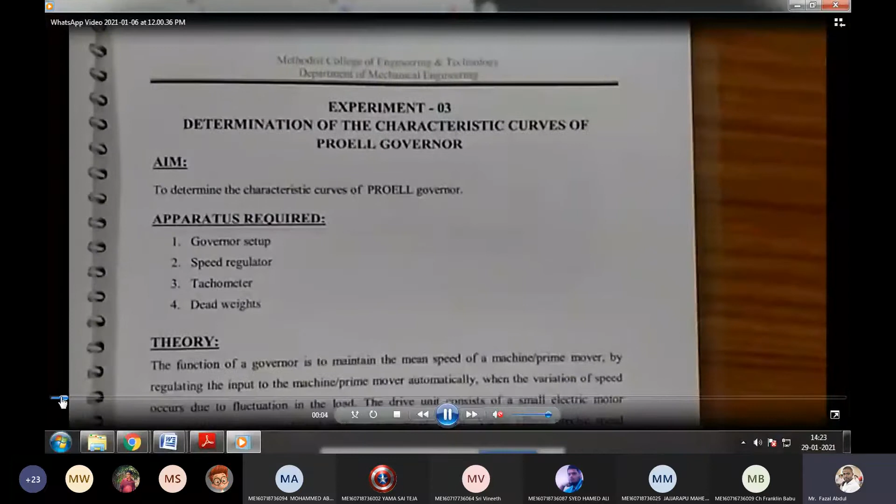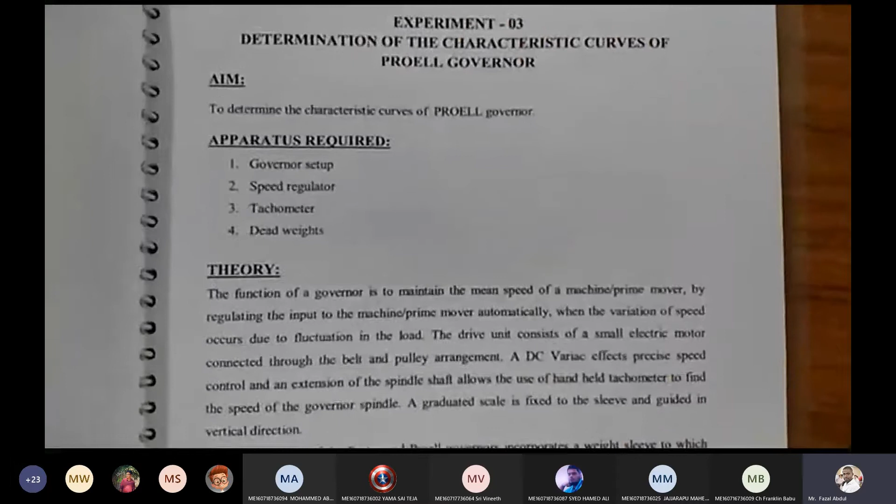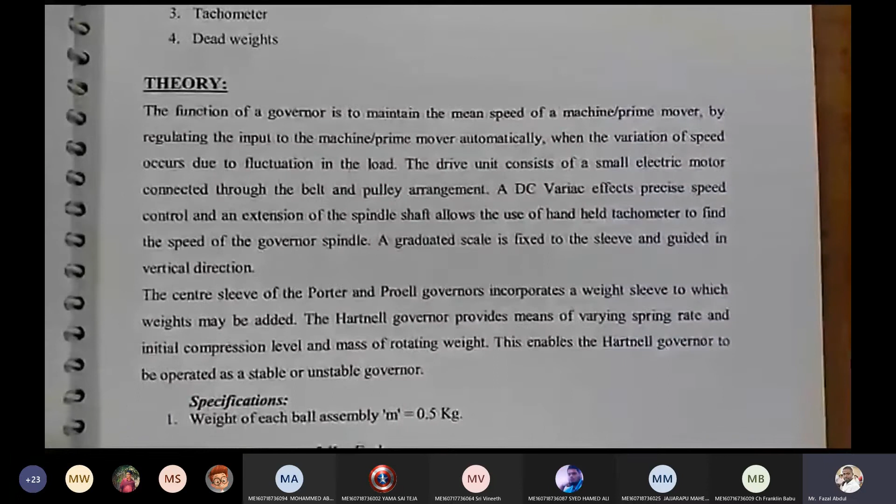For this contact type of tachometer, speed regulator, dead weights are required. The specifications are: each ball assembly ball is 0.5 kg, weight of the sleeve is 2 kg, extension of each length 75 mm. I will show in the video what is extension BG.

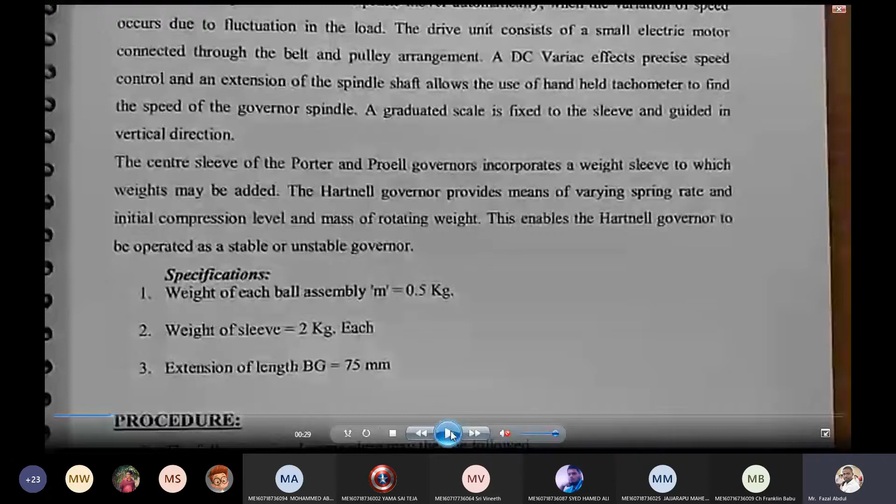Now see here, in previous cases the governor setup was without this extension ball, meaning the balls are here, but in this case extra links are provided, and centrally the load is added. So by seeing this diagram you can conclude this is a Proell governor, by seeing these links.

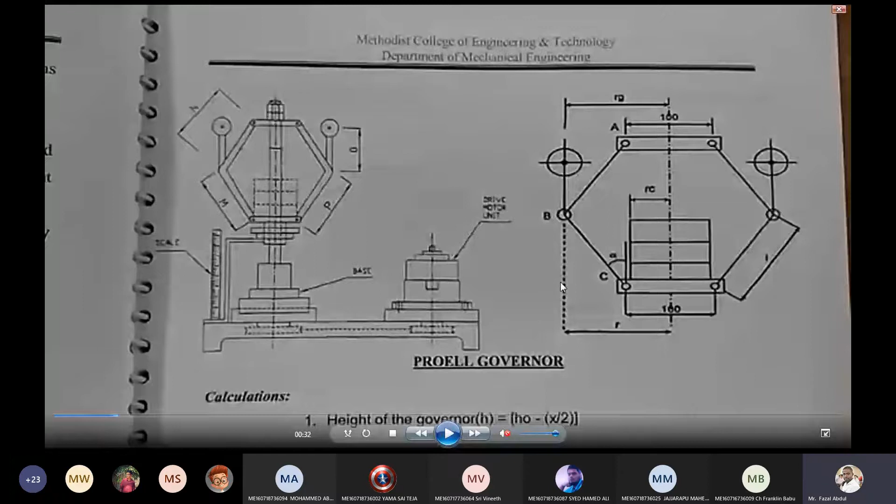How much is the length here? 75 mm, that is given as a specification. The length of the arm, radius of initial radius of rotation.

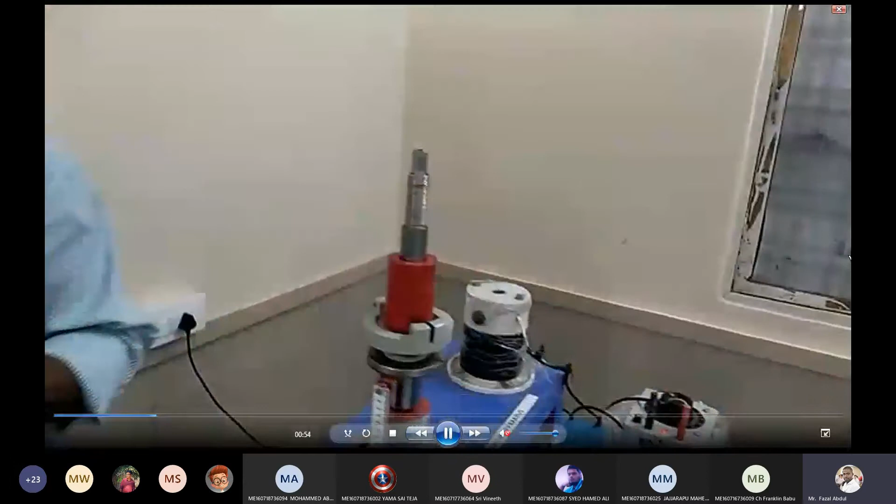Now see here, the setup is changing. Initially it was a Porter governor, now it is a Proell governor. See here, balls, extension balls.

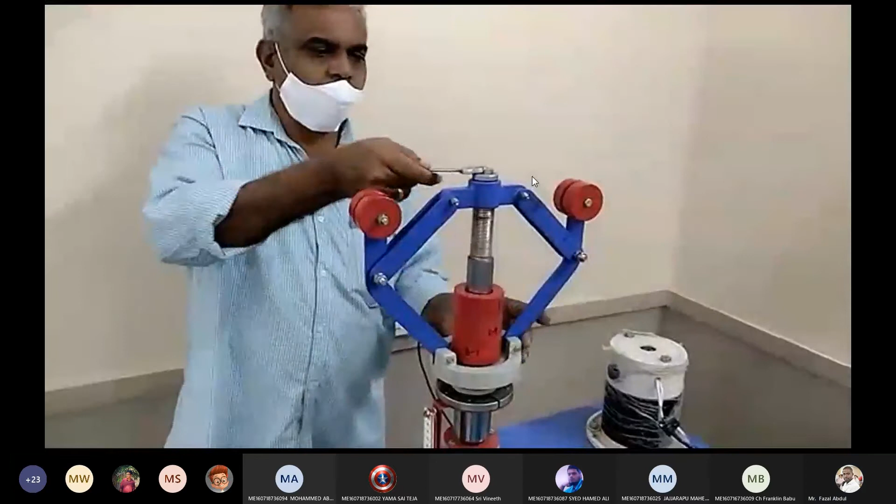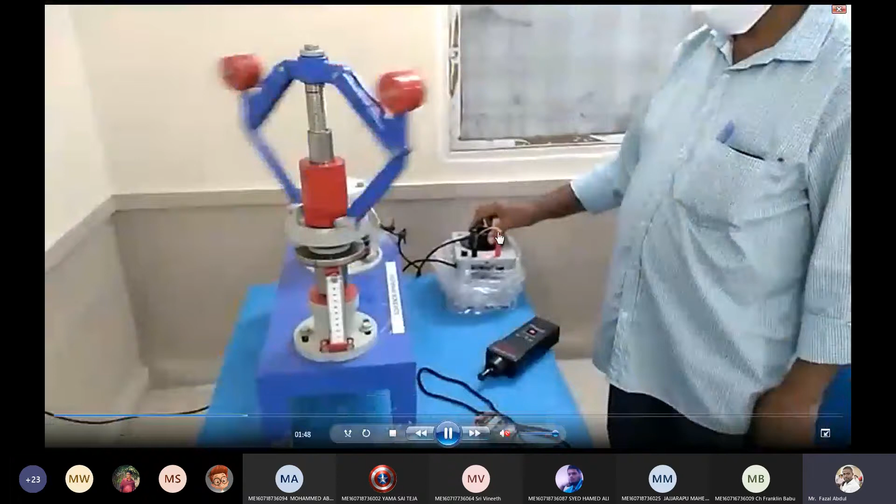This is a dimmerstat voltage controller, current controller. As speed, the voltage increases, speed also increases. Here you can observe the sleeve displacement. Because of lifting upward, the sleeve displacement can be measured on the scale.

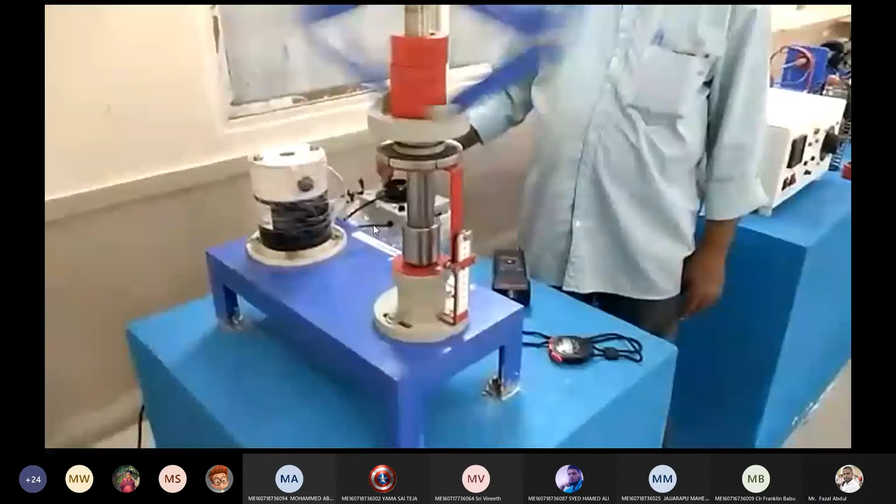Now, for the first time, increase some voltage.

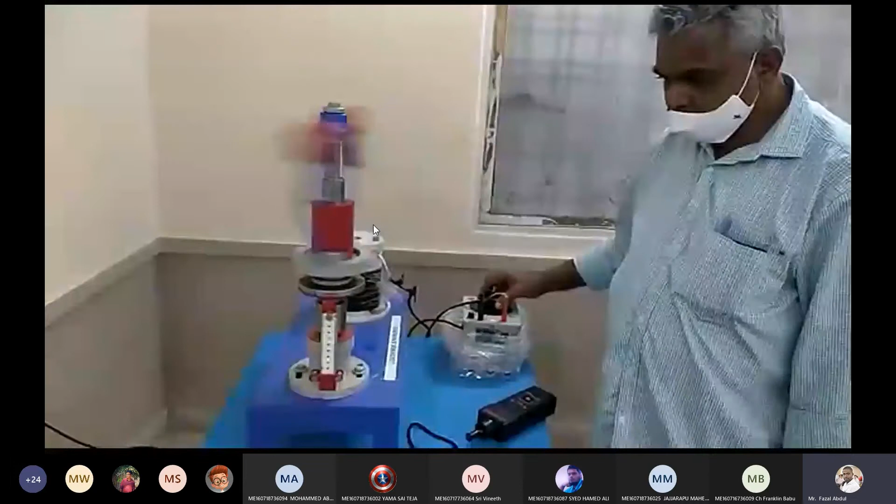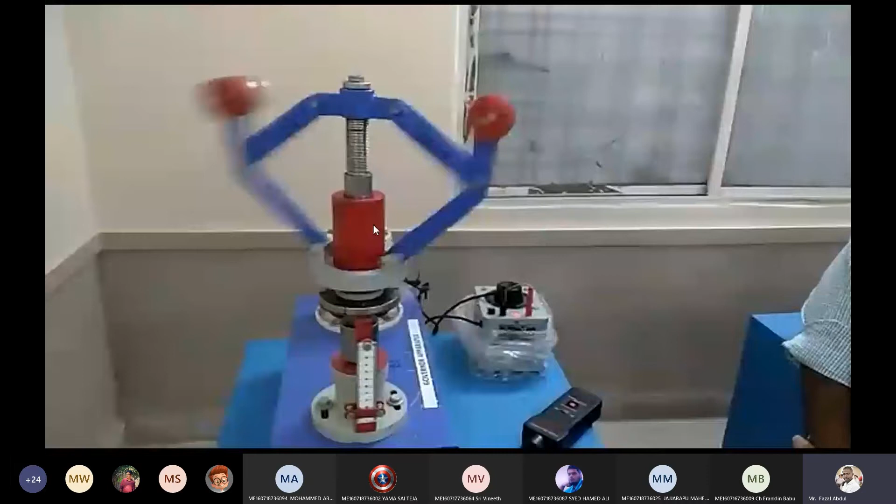Roll number 60. Is it your first class? 64, not 60.

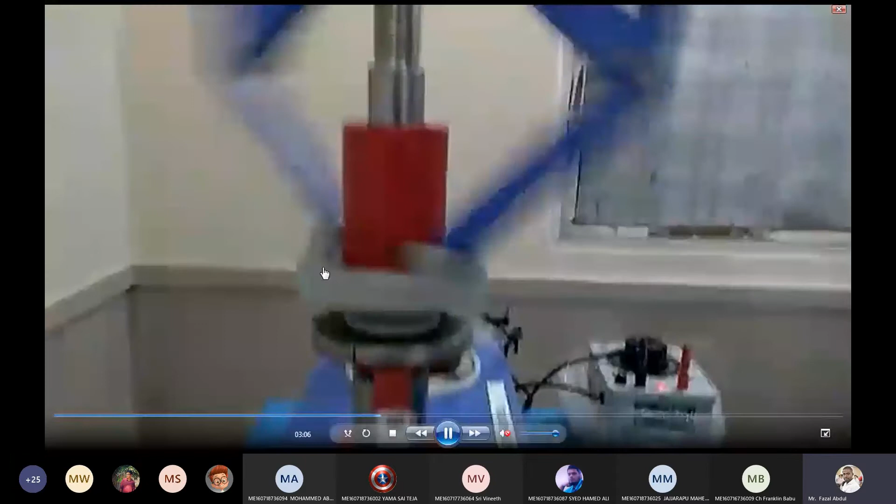Then you are again asking what is the purpose it is used for. At the beginning, in the first class only, I told you.

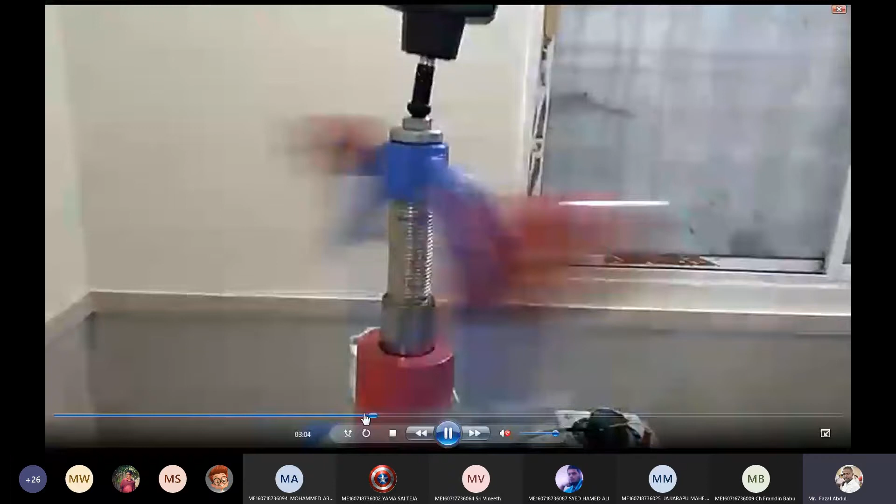How much was the speed? The speed is measured in RPM. The displacement is measured on the scale.

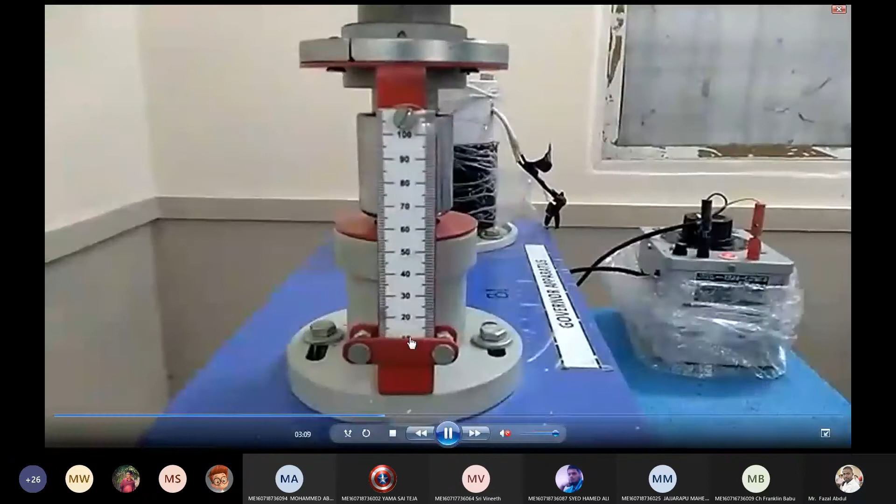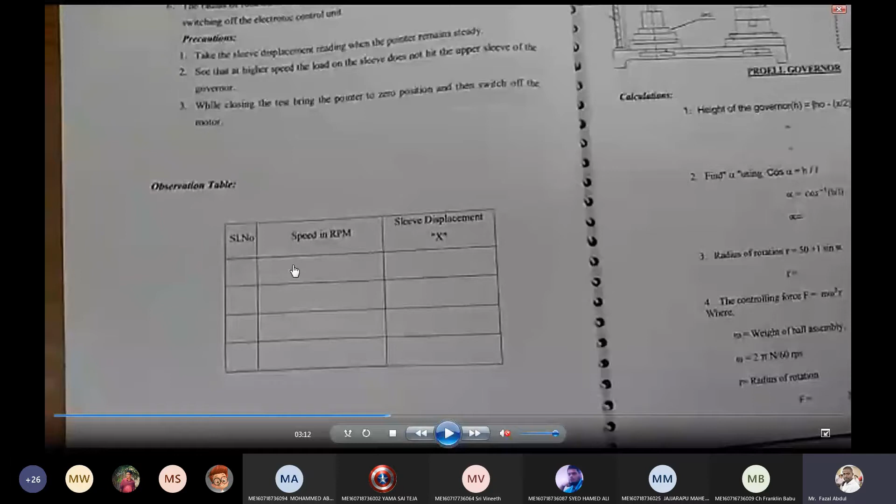You people first make a table on your A4 sheet paper: serial number, speed in RPM, sleeve displacement X in mm. Make a table, then write the first speed: 150 RPM and sleeve displacement as...

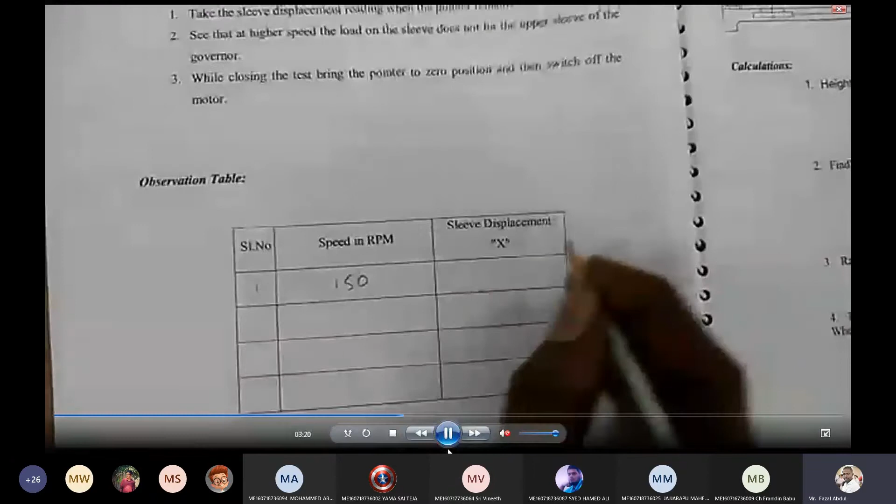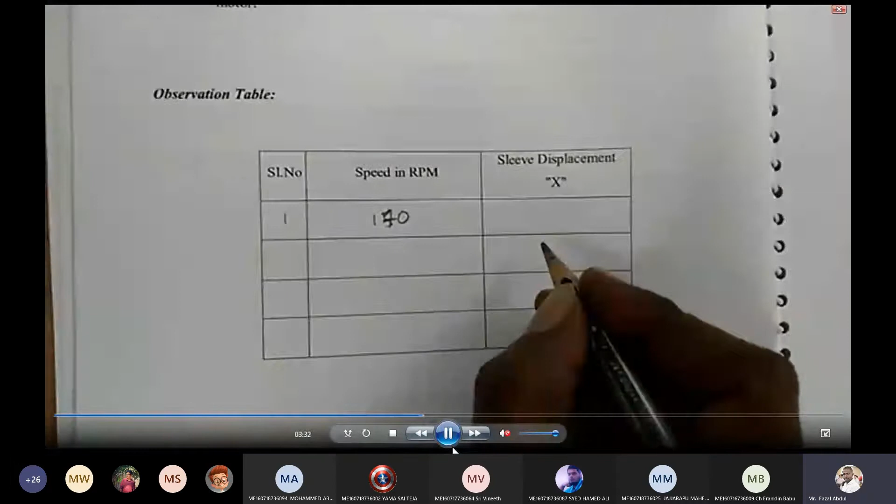Speed is 170, sleeve displacement 26 mm. Now second time increase the speed with the dimmerstat, increasing the voltage, which simultaneously increases the speed, and here the sleeve is going to lift upward. So at the second time also we have to measure the speed and take the sleeve displacement.

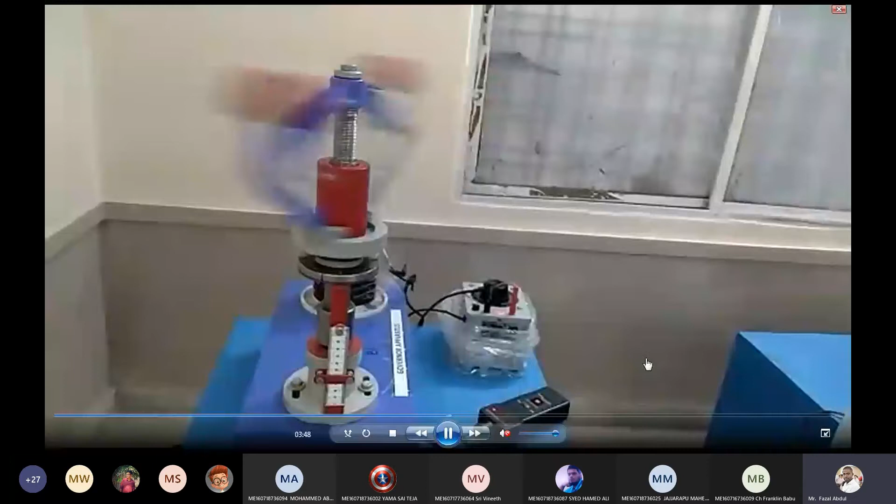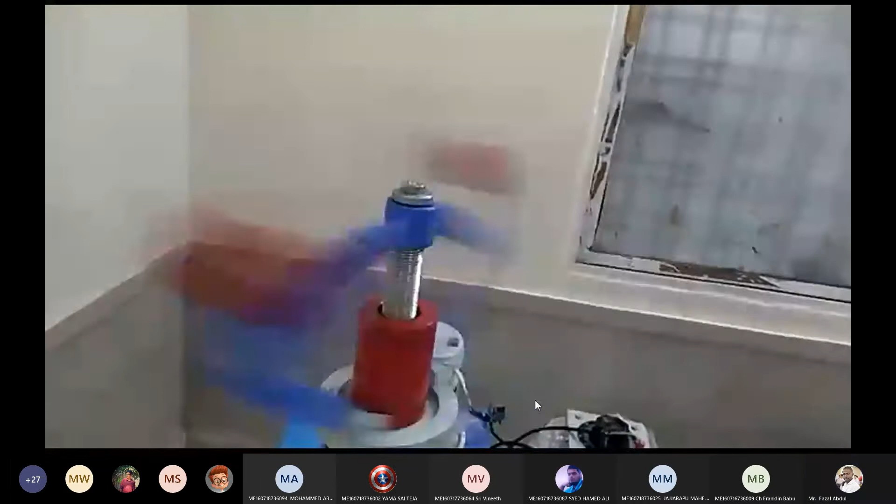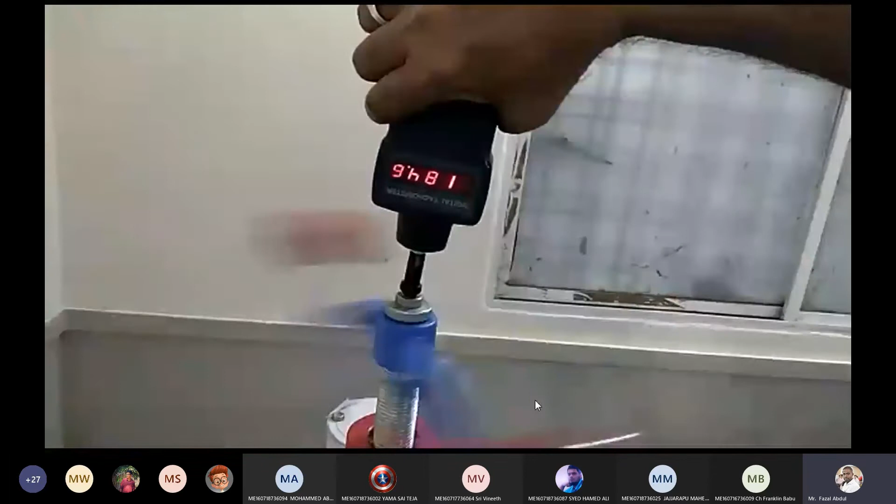Take this, this is a contact type of tachometer. Now the sleeve displacement is here, it is measuring.

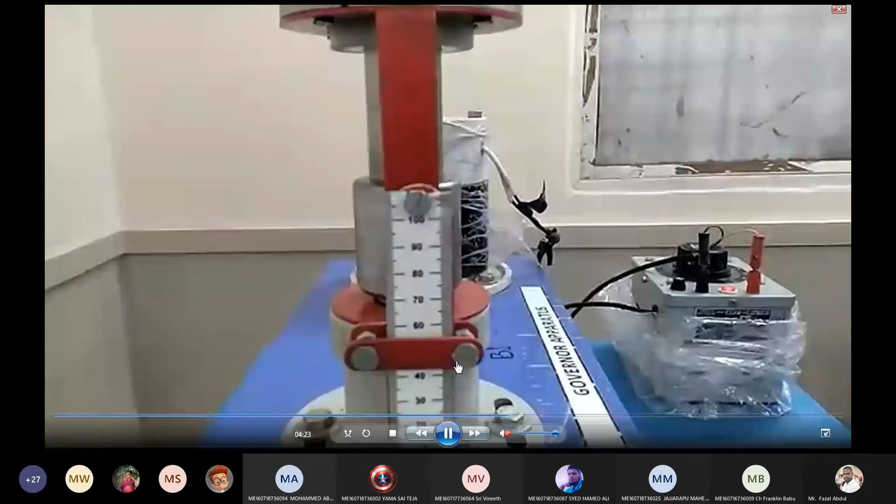Now note down on papers. Second reading: the speed is 184 RPM, 55 mm. Note it in your A4 sheet papers. This is a Proell Governor setup.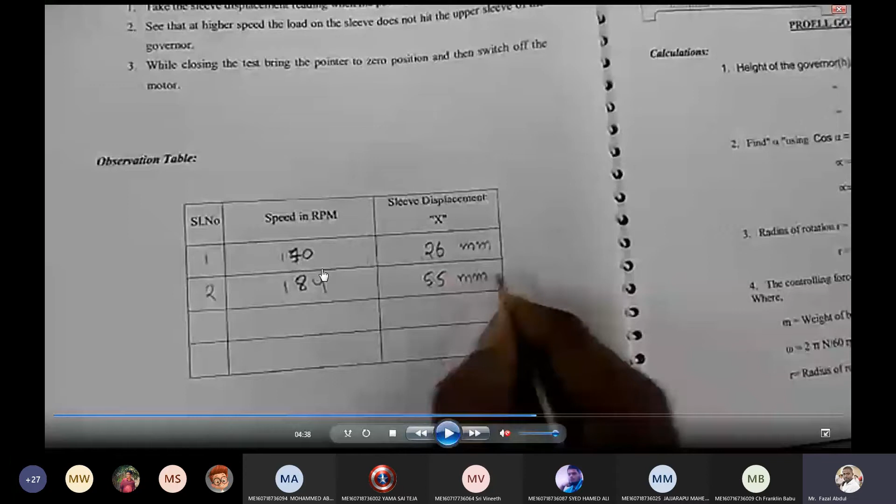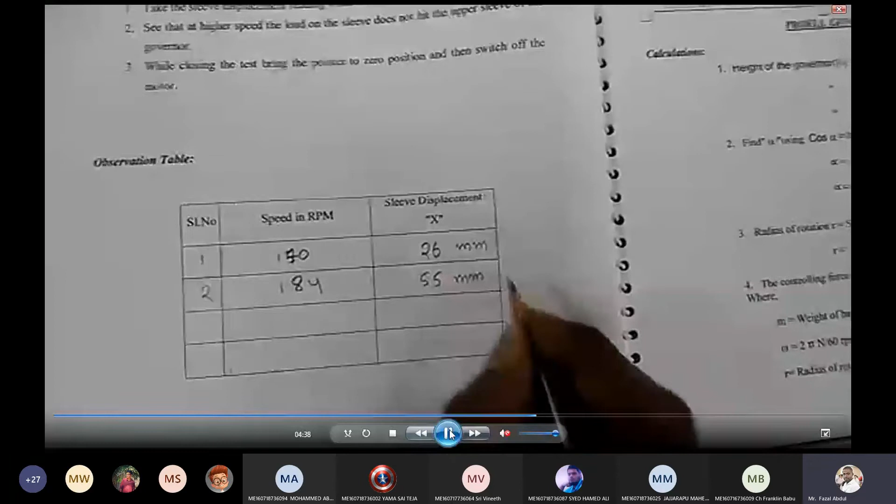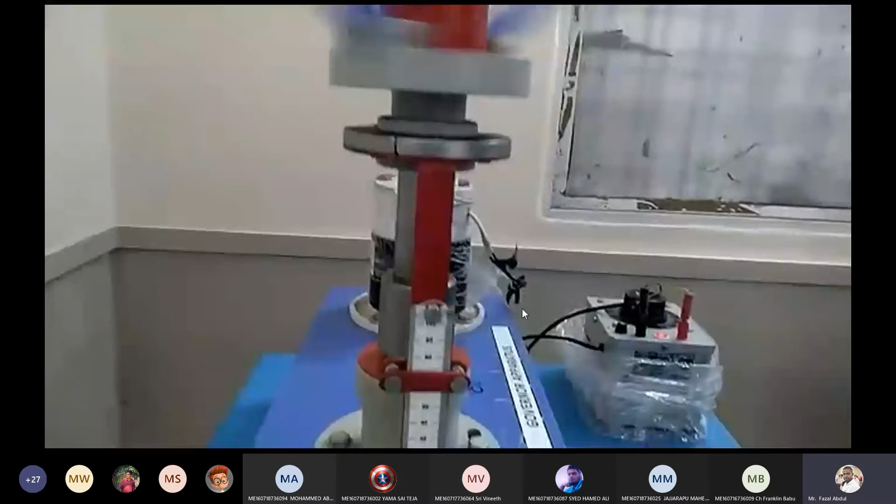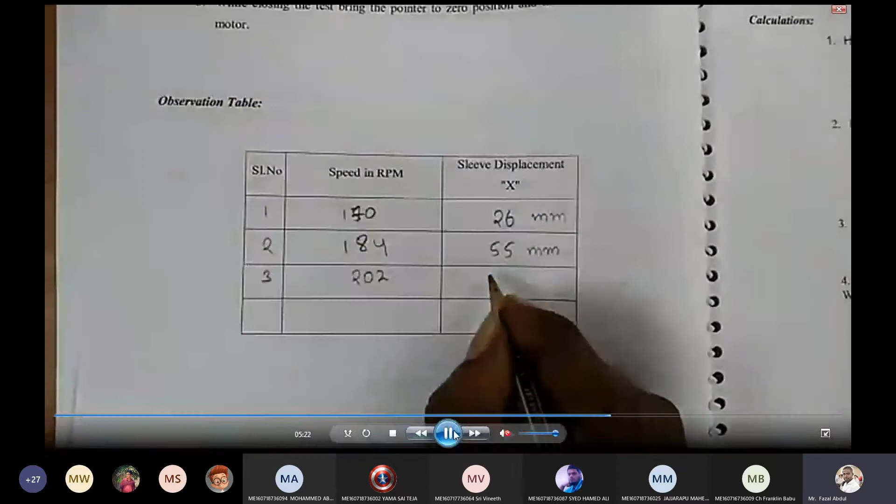Now third time increase the voltage somewhat. Take the reading. Note down the third reading. The sleeve displacement is 70 mm.

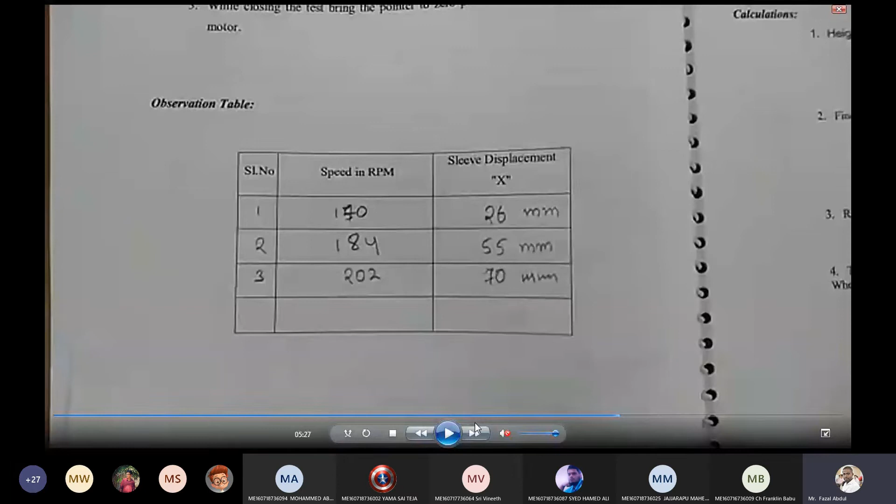Note down: third reading is 202 RPM and 70 mm sleeve displacement.

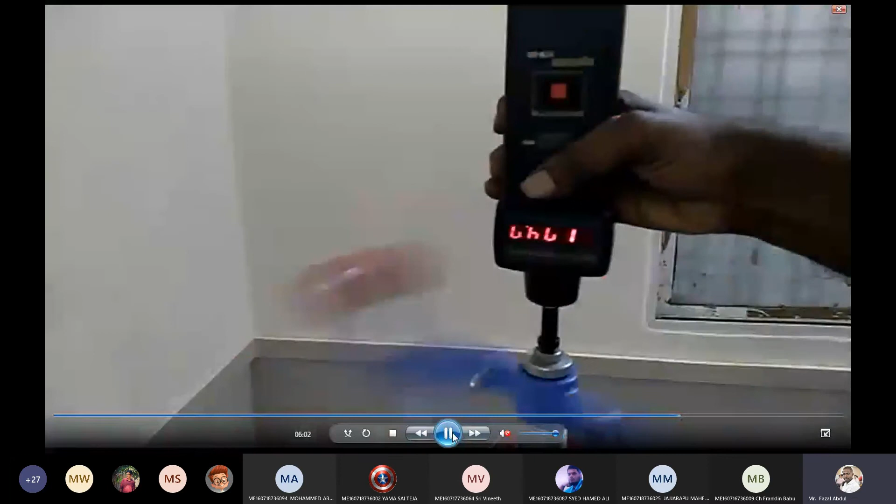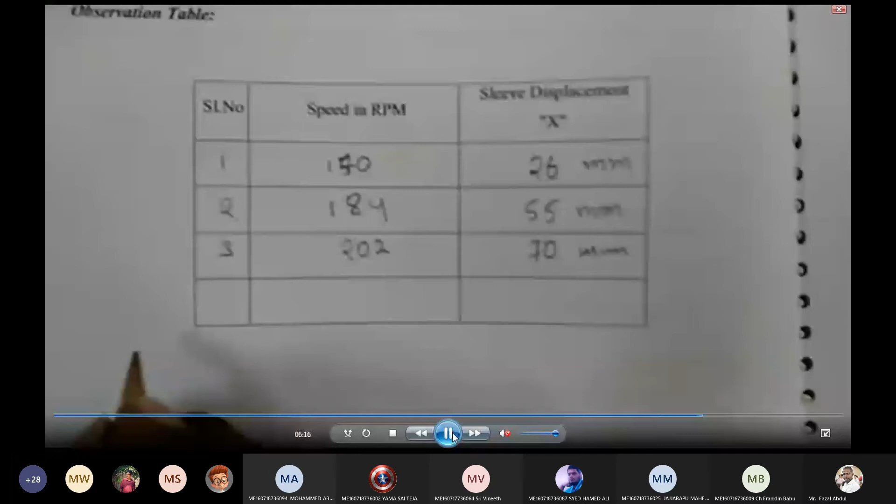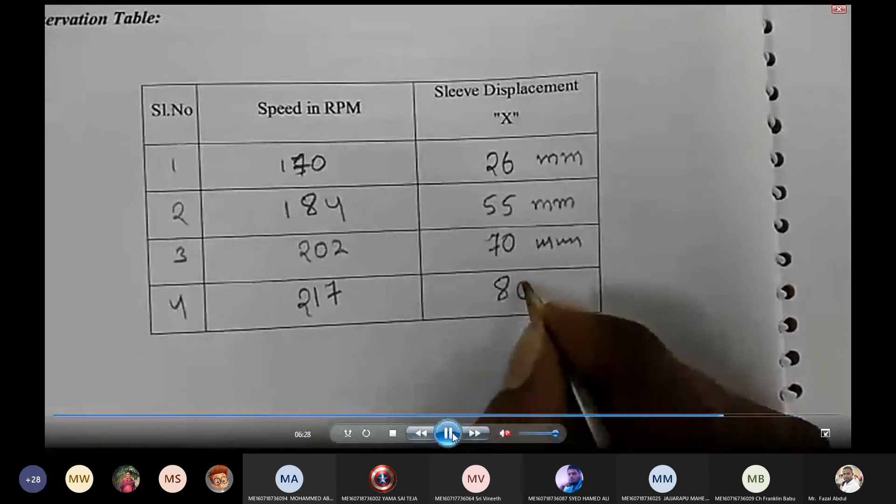Note down the fourth reading. Note down the readings.

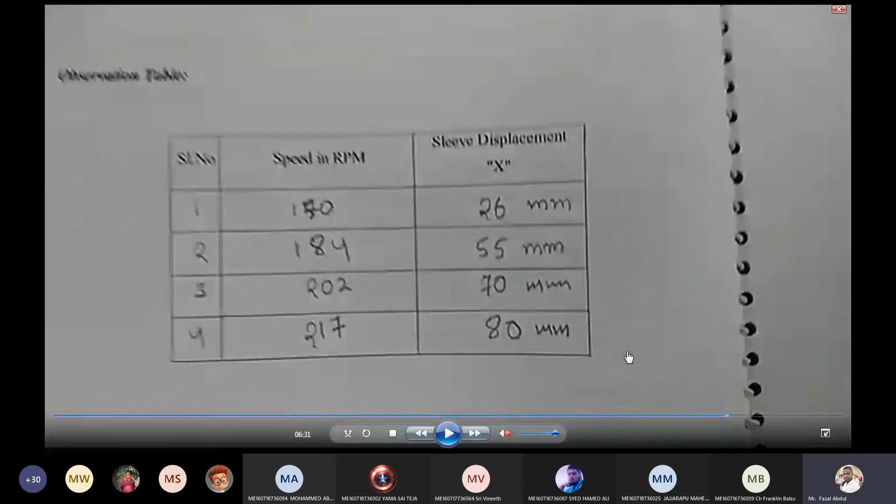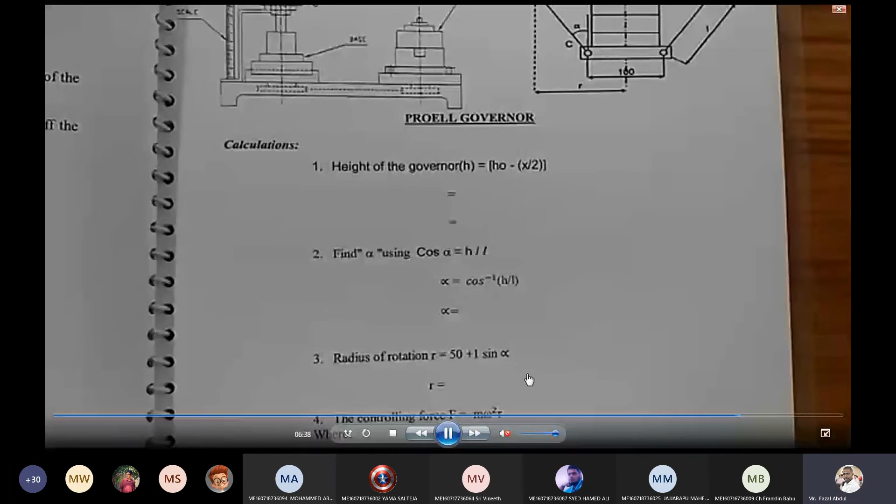Now these are all the calculations here. Radius of rotation equals 50 plus L sin alpha. Cos alpha is equal to h by L. Height of the governor equals h naught minus x by 2.

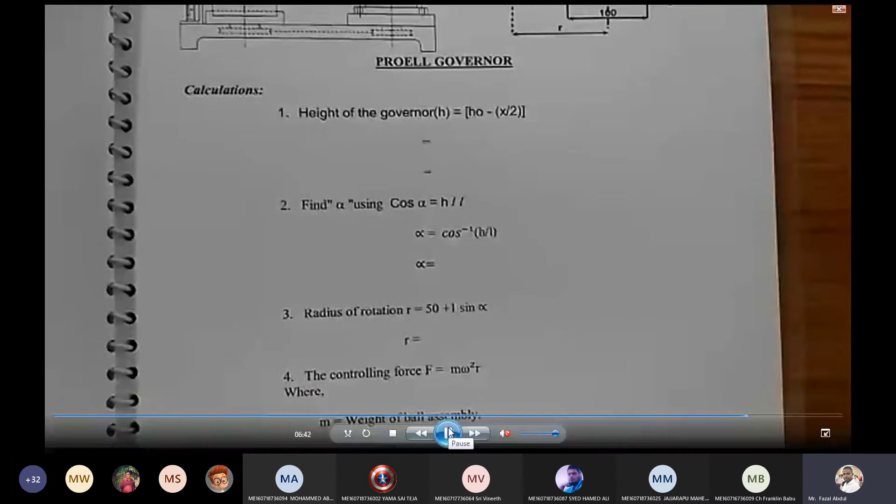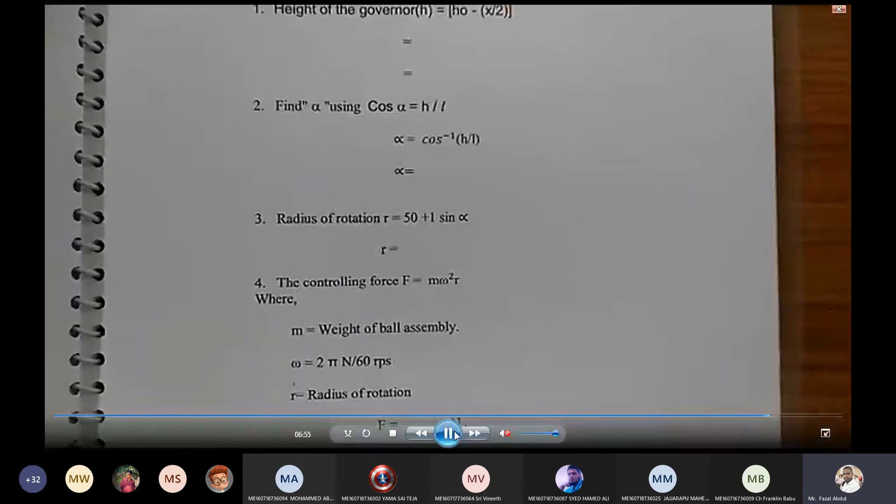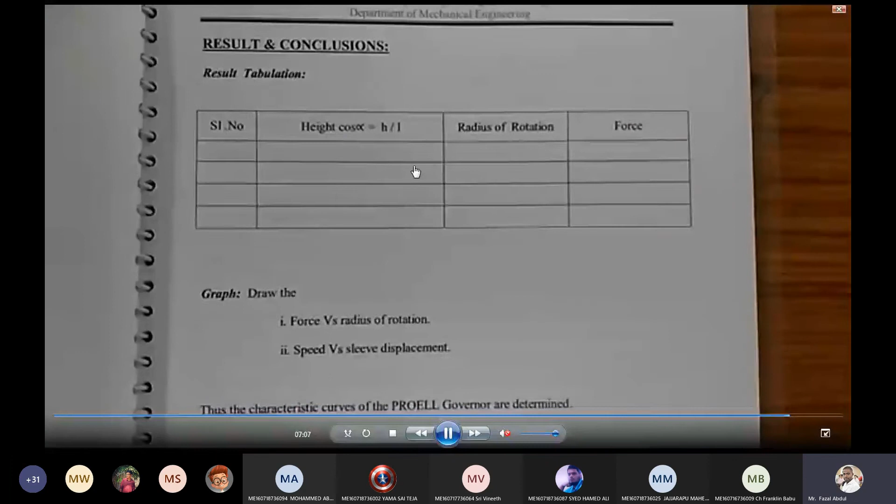These are the relations, the same procedure followed here as you did in the last class. Only the readings are changed and the setup is changed. Here, after calculating all the values, a force versus radius of rotation graph and a speed versus sleeve displacement graph is required.